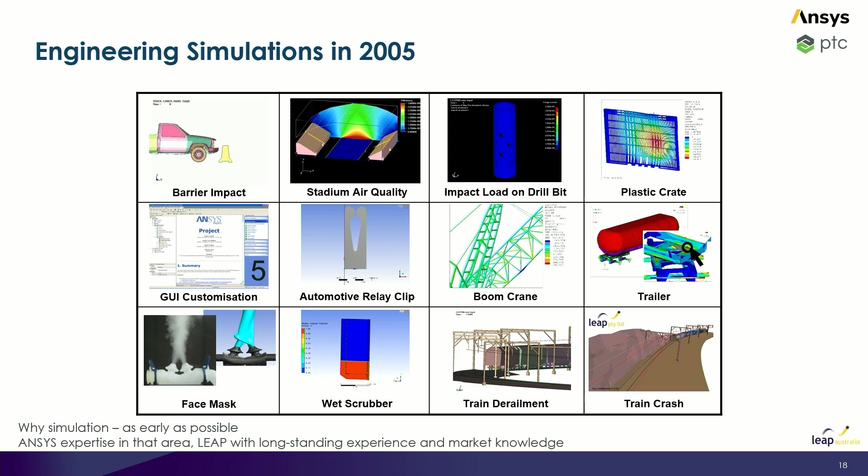Pretty much mining, trailers, trucks, a little bit of railway. This was a slide actually from our set that showed what we can do from our consulting support. Of course, that has changed, and simulation is evolving as well a lot. One example is, for example, digital twins. That came up around 2010, for example.

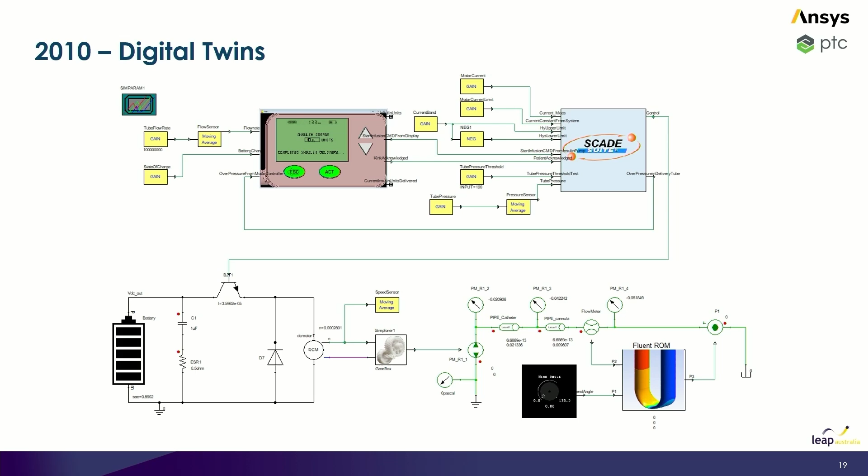So this is not exactly a digital twin, but it is actually a good representation of an overall system simulation, where you have an insulin pump. It's modeling the electrical system. You get even the user interface, you get the embedded software that is making the decision, and you even include 3D modeling for fluid flow simulation to look at the dose for the patient correctly. So everything in one model, everything ready to go and really good to test certain applications.

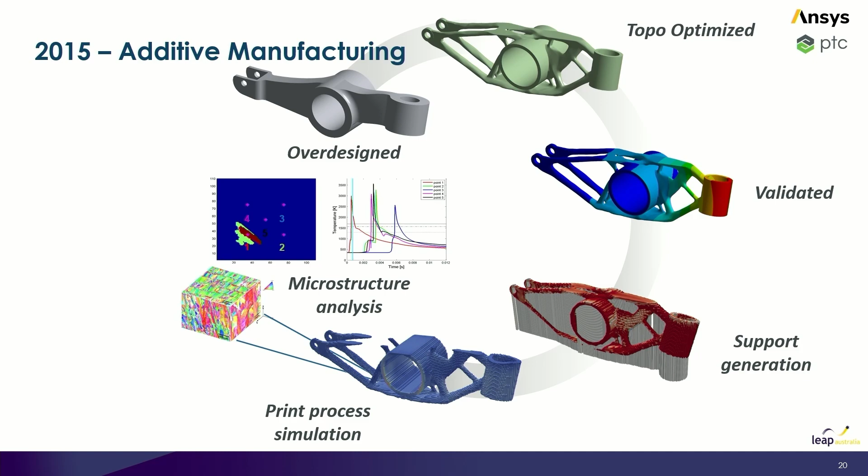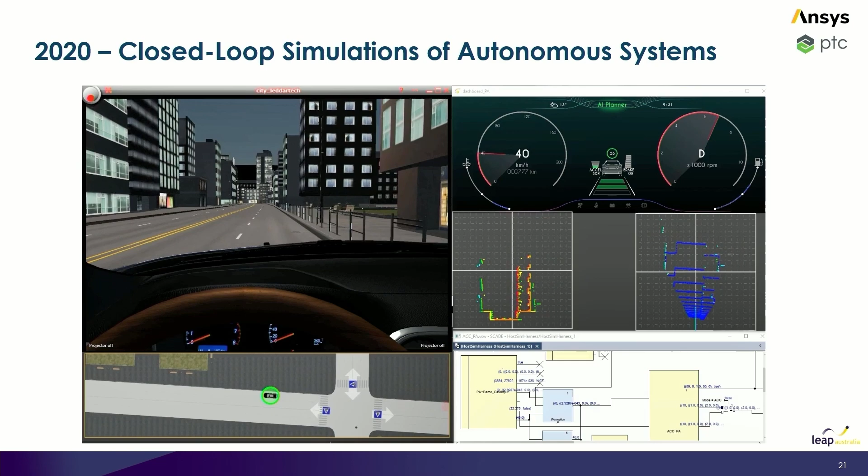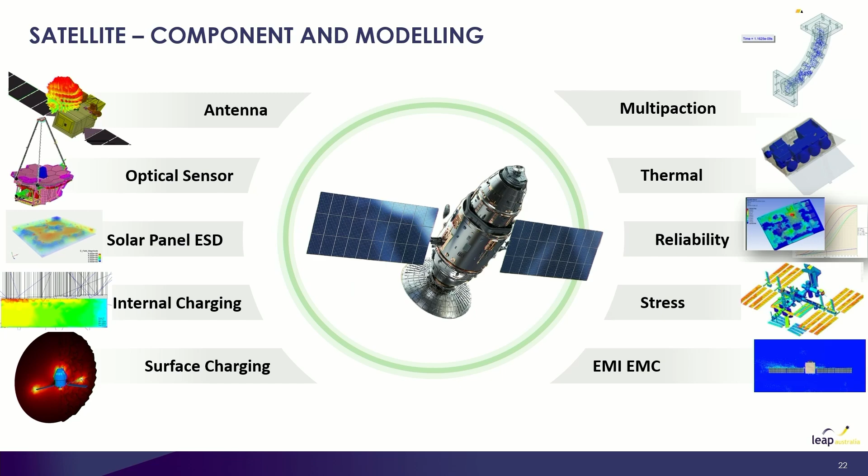So what can be done for space? There are many things that we have been doing for many years already. For example, antenna placement is a big topic for all the industries. Then charge is a big topic. But also the classical ones, thermal and structural integrity. We're looking at spacecraft and satellites. And then also the topic of multipaction, which is really niche. We're trying to avoid breakdowns in, for example, microwave equipment, like cavities and waveguides.

One quick example, of course, antennas. And I know in the audience there are people who know much more about antennas than I do. Just a helix antenna, designing one, and then you deploy that as an array on a ground plane. Very important if you want to get radiation patterns out, and people are also interested in the link between those different single antennas.

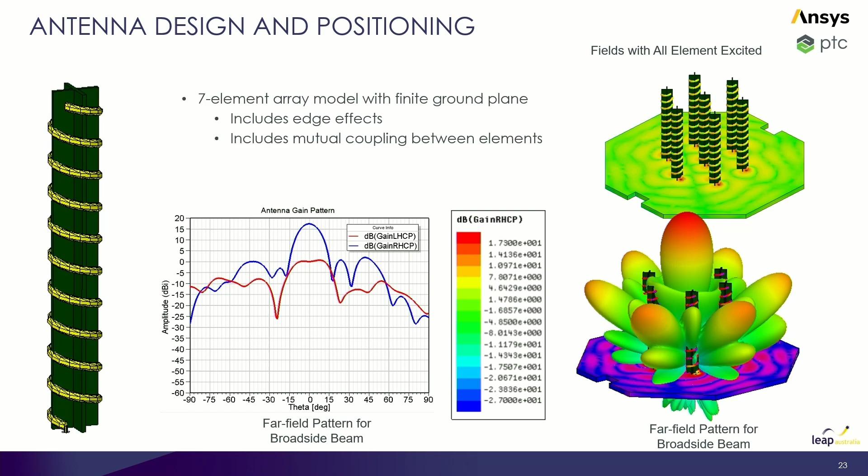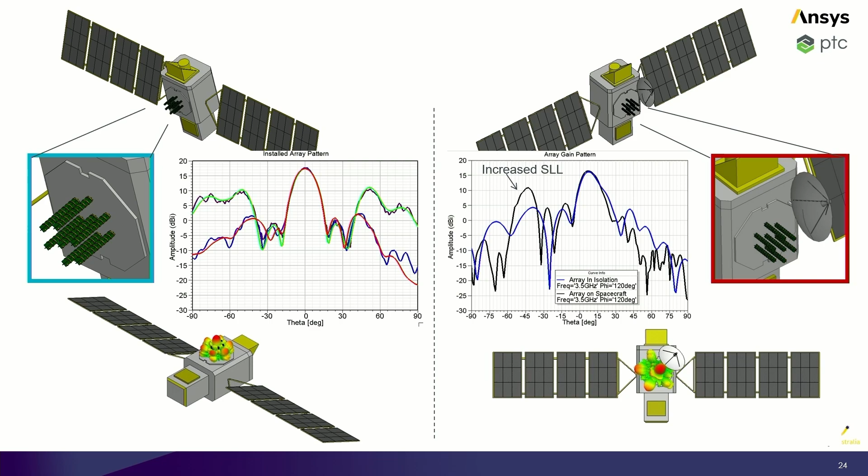But what's really important is that you need to simulate the platform as well, because that changes the antenna performance. And you can see that in that picture. If I place another part in the vicinity, like a dish antenna, you can see that there are side lobe levels going up on the right side. So it's super important to have your antenna designed in free space, but then moving on to the platform and simulating it as well.

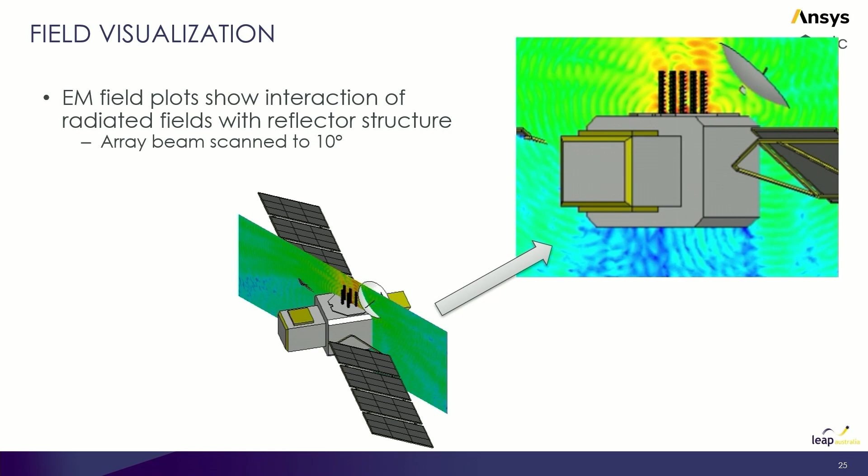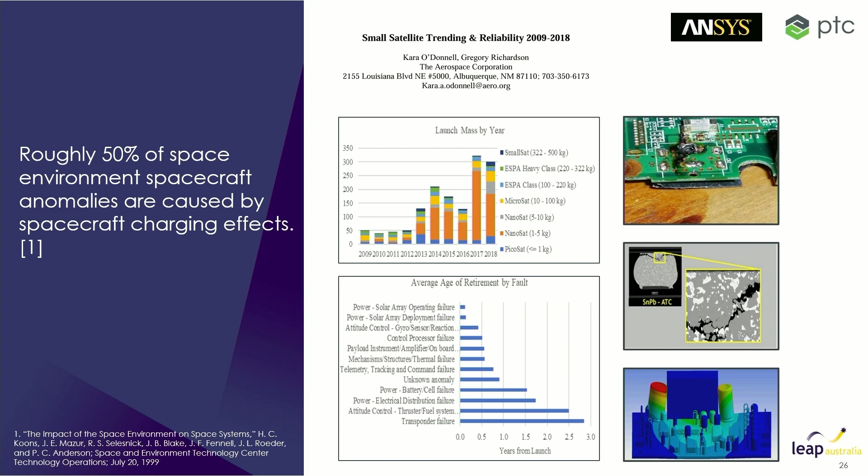One benefit of simulation, of course, is you can look at the fields and visualize them so you can see what's going on and how your device actually functions. So then we had a look and asked ourselves, where are the mission failures coming from that come from problems in the design? Looking through different literature and trying to connect what we can do and how we can help, it's mainly reliability problems in electronics and charge problems that are a big topic for mission failures, taking away the infant mortality and also launch problems, but looking at very long-term operations.

And what you really need to do when you look at the reliability of electronics is to stack up the life cycle of a device, it can be an electronics unit, across different events. So you can start with manufacturing, you can also use the transport, but what's important for us is, of course, the launch, a very important event in its life cycle. And we can model that launch by directly putting a PSD in after you have done your design from Altium, and then creating a life curve.

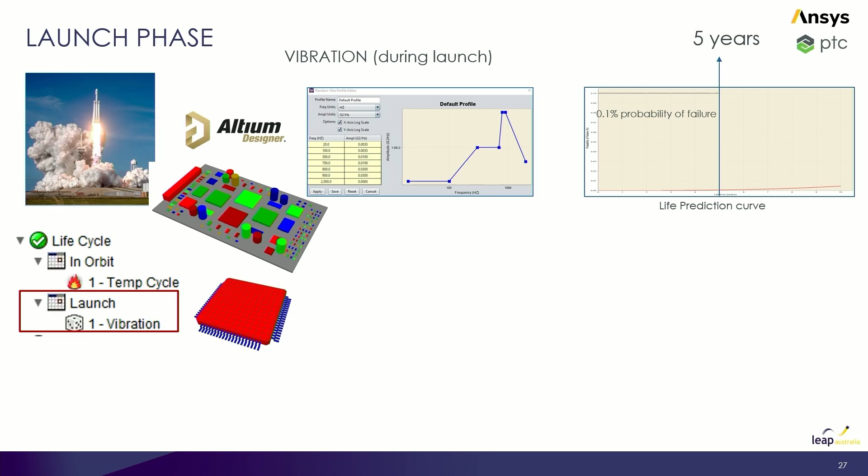So in that case, we're using the probability of failure that you can live with, that you are okay with, and of course the life cycle. So you're intending to have your device operating in space for 5 years or more. So we create that box, and then we can calculate when it is failing. And we can do that in a second event for the shock analysis as well, when the equipment separates from the rocket, and we do the same.

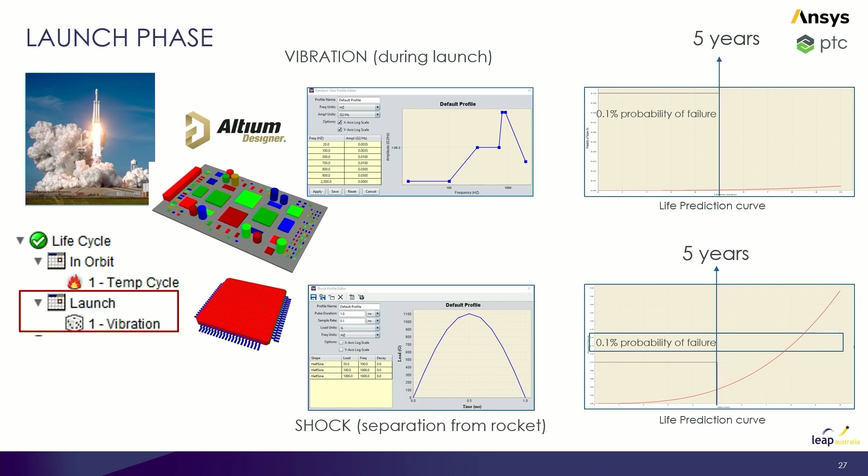So in the next step, we are in orbit. And what's problematic in orbit is the temperature changes. So we look at the temperature in the electronics, try to understand when the electronics are operating and when not, because not all the electronics are operating all the time. So the temperatures are slightly different. And we also take temperatures that the satellite sees in space, and from that we are creating a profile.

Just a profile over time for that event, and we can then run it over 500 cycles or whatever we have across the 5 years in space. We can also use it from STK, so if you have concrete mission data where you want, for example, to get your temperature fluxes for a concrete mission, for a flight path of your satellite, you can also get that from STK.

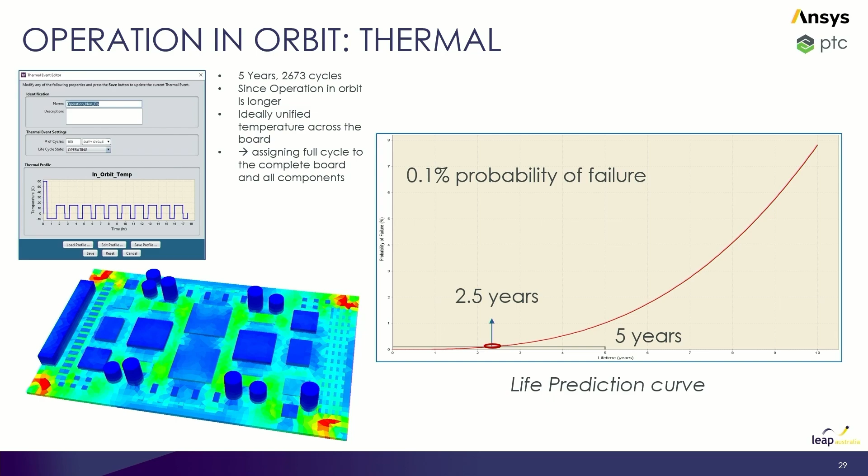So then we can create a life curve for that as well, and you can see with the solder fatigue, the board is failing after 2.5 years and is not reaching the 5 years. Understanding what goes wrong is very important, and of course you can do countermeasures, redesigns and all those things. We can drill down to each component and show you which component is causing the problem, which one is failing first. And we can also change solder material very quickly and rerun the analysis.

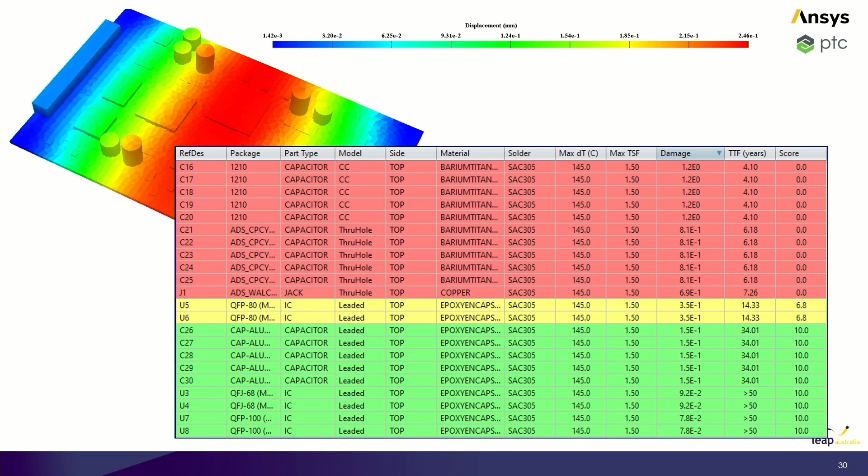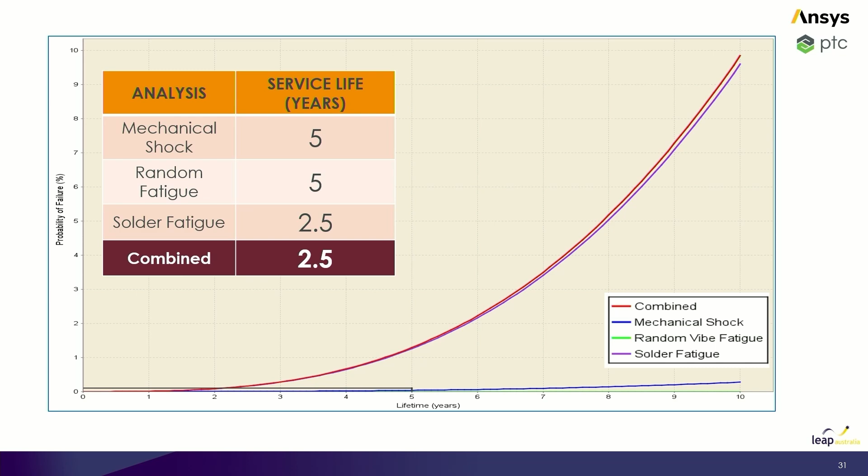So in the end, and that's the biggest benefit of that workflow, the tool and the software stack up all those events with all their failure rates and create an overall combined failure rate across those events. So you get feedback: am I safe in my mission for the electronics unit or not?

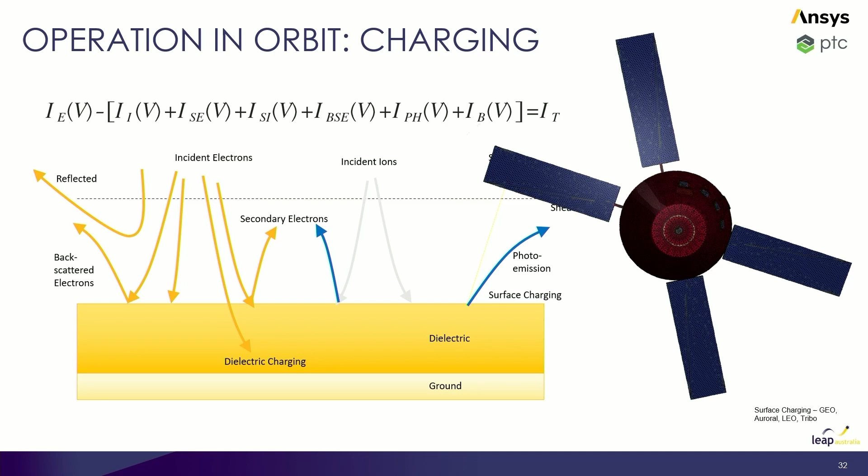Let's stay in orbit, and this is my last half of the presentation. The biggest problem there is charging. In a nutshell, particles are hitting the structure, electric fields are created inside, they're penetrating low conductive materials, and with that you get arcing. The arcing can cause problems on the communication equipment, but it can also cause breakdown and damage in the material.

And we have a partner in the US who has created a facility where you can test that. It's a vacuum chamber that mimics the temperatures, and it allows you to bombard your device with different particles, differently charged in different amounts, very flexible for whatever orbit you would like to look at. It's got an antenna inside to pick up EMI and radiation from those events. And it's also got a camera, so you can actually see the discharge.

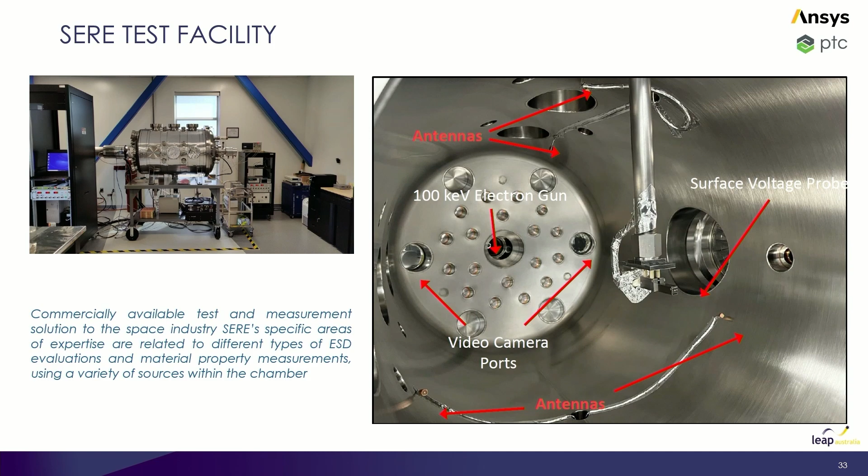The same company has created a technology which allows you to simulate that chamber. So we have a tool that can do that for you. If you have a CAD model of a device, you can put that in, get different energy levels and a mix of energy levels, and bombard your structure virtually.

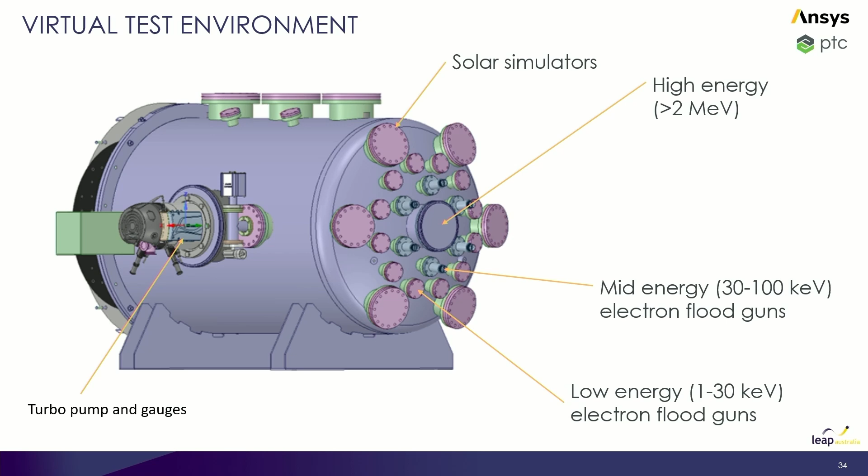So a very good way of pre-complying, pre-testing before going into a chamber and before going to testing. And that's the main message we want to give: lower your costs by simulating first and then having the confidence going into the full test.

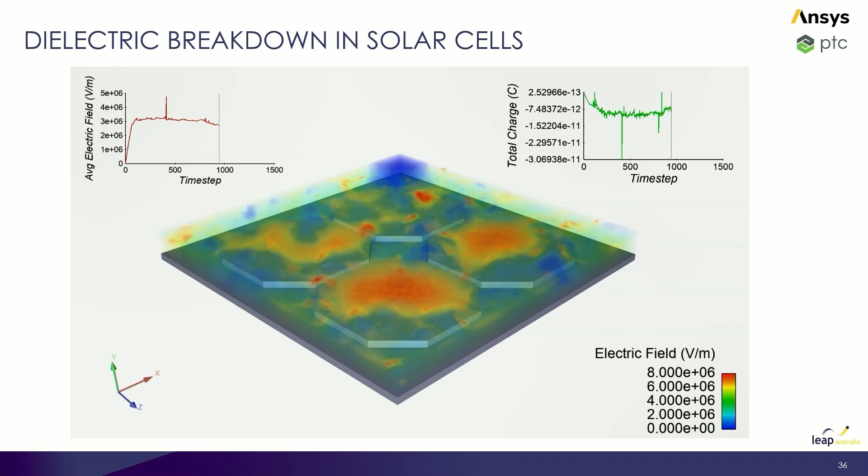If you want flux levels for a specific mission, you can do that as well. Again, my colleague Bennett is here at our booth. He can model those things in STK, get the data out of STK, and put it into our virtual vacuum chamber.

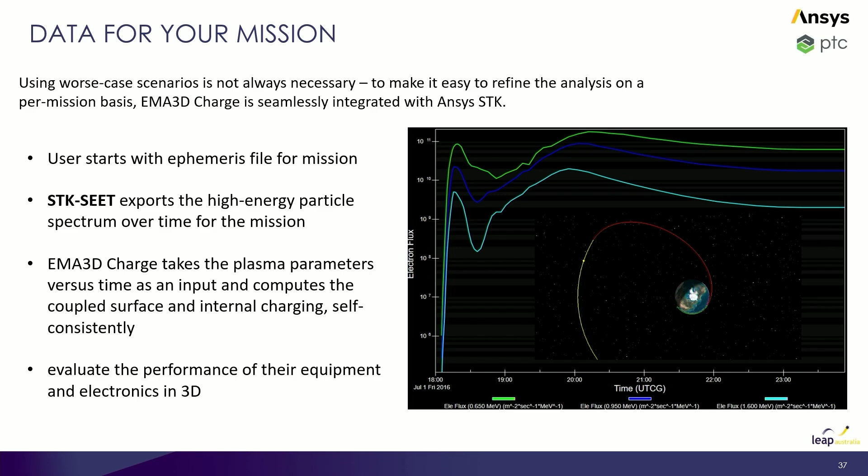So that's basically it. A couple of ideas and workflows for what can be done to take risks out and test things specific to space environments.